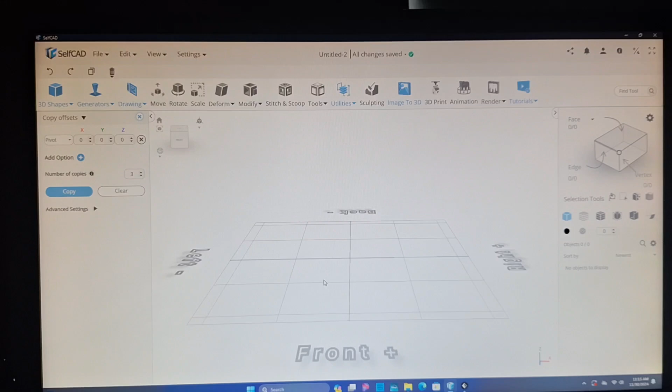Today, I will be showing you an easy SelfCAD build for beginners. First, you are going to grab a cube from the 3D Shapes menu on the top and size it down into a standing rectangle.

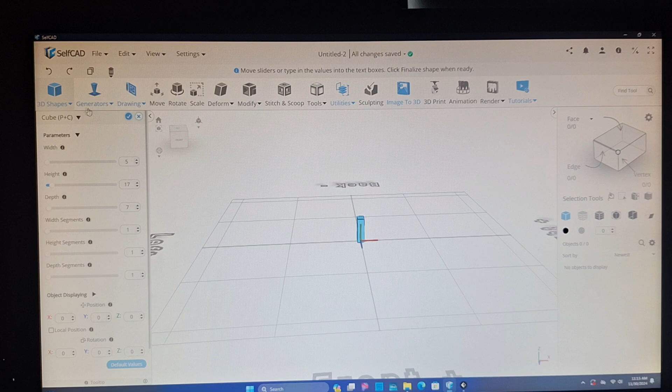Once you have the rectangle, you are going to need to move it over out of the center of the workspace. You can do this by selecting the rectangle and clicking Move in the top menu.

Once you have the rectangle off to the side, select Tools in the top menu and go to the Copy button.

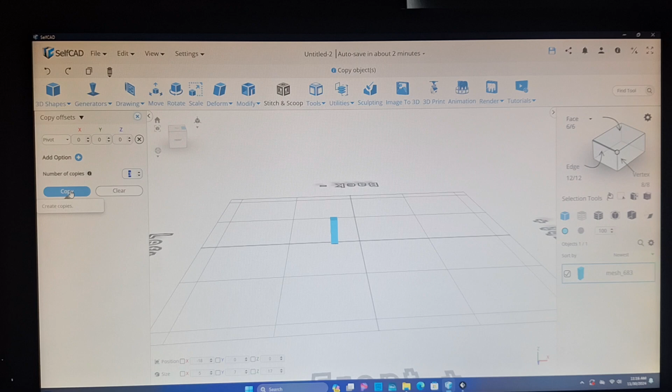In the left menu, you are going to select 3 for the number of copies, and you will need to select Pivot in the Placement menu right above that.

Now select one of the rectangles and in the top menu click the Deform button and then the Skew button. Skew the rectangle into the center of the workspace and repeat this with the other 3 rectangles.

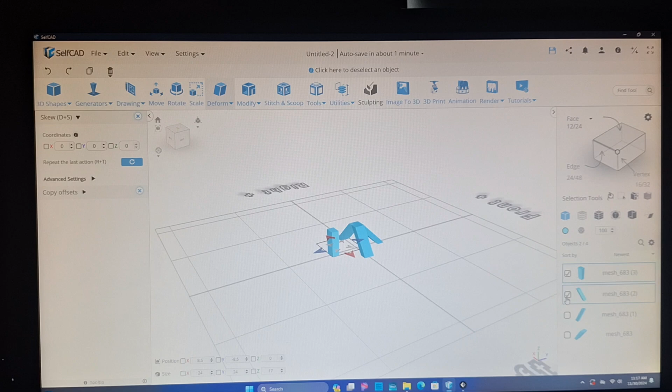They should all be connected in the center of the workspace.

Now you are going to go into Shapes in the top menu and select a cylinder. You will need to size this down to sit on top of the 4 rectangles.

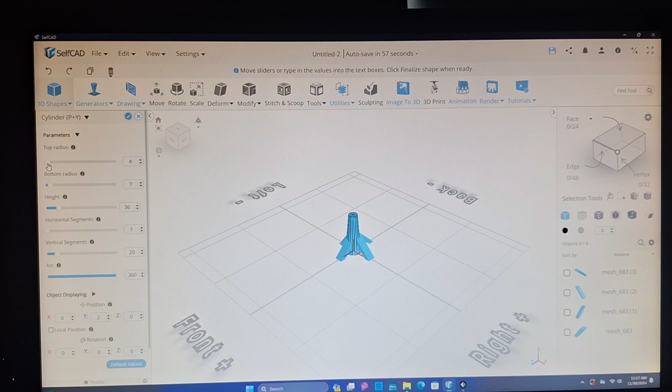Once you have sized it correctly, you will need to lift it up. You can do this by selecting the cylinder and then clicking Move in the top menu, using the green arrow to lift the cylinder and the blue and red arrows to center it on the rectangles.

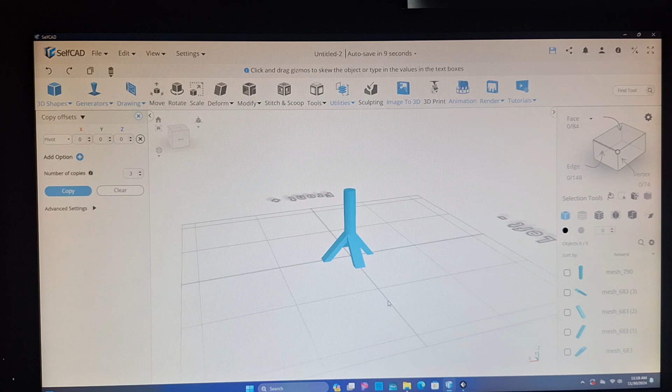Once you have it in the right spot, go into the Shapes in the top menu and select Cone. You will want to scale this to fit on top of the cylinder with a slight overhang.

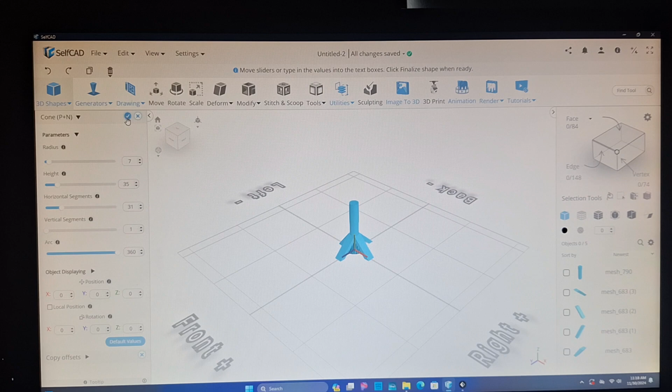By adding more horizontal segments, it will be more round when you print it. Once you have sized the cone, you will want to select it and move it on top of the cylinders.

And there you have it. A very easy 3D rocket to get you comfortable with SelfCAD design software.

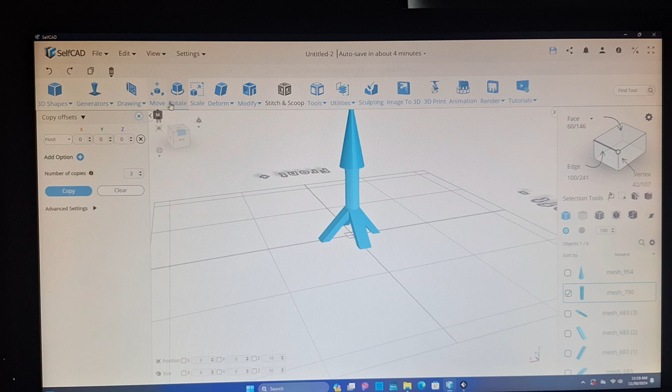At this point, you can make slight adjustments to the build to make it taller or wider, etc. You can do this by selecting a part of the rocket and in the top menu, go to the Scale button.

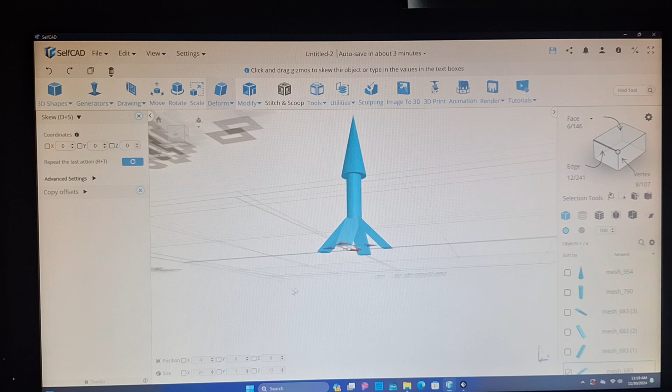Now that the rocket is to your liking, select all the objects in the lower right menu and then click Edit and Merge. This will make everything one object so you can save it as an .stl file and move it to your slicer.

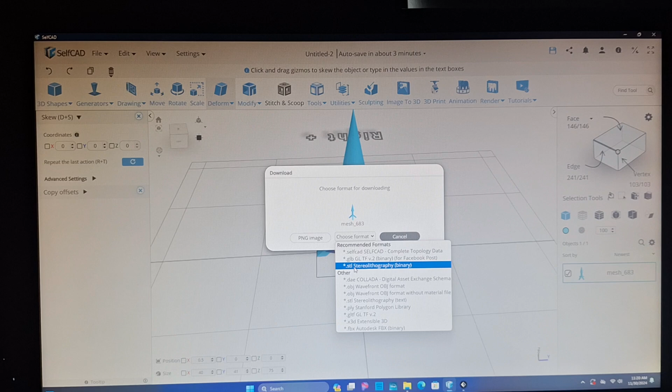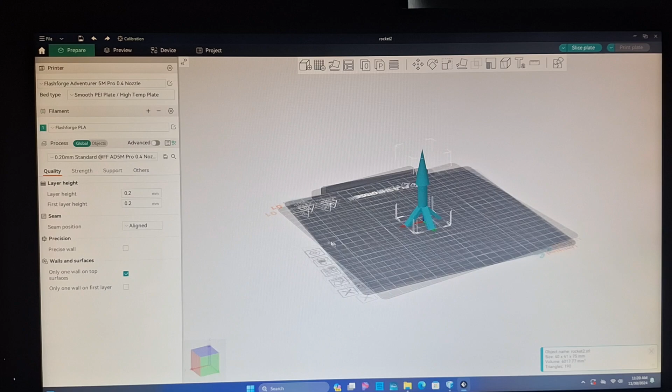Once you have exported the build as a .stl file, you can move over to your slicer and import the build. Since it has a slight overhang, I am going to add tree supports before I slice the print.

Last step is exporting the plate sliced file and adding it to your printer.

I hope this video was helpful.